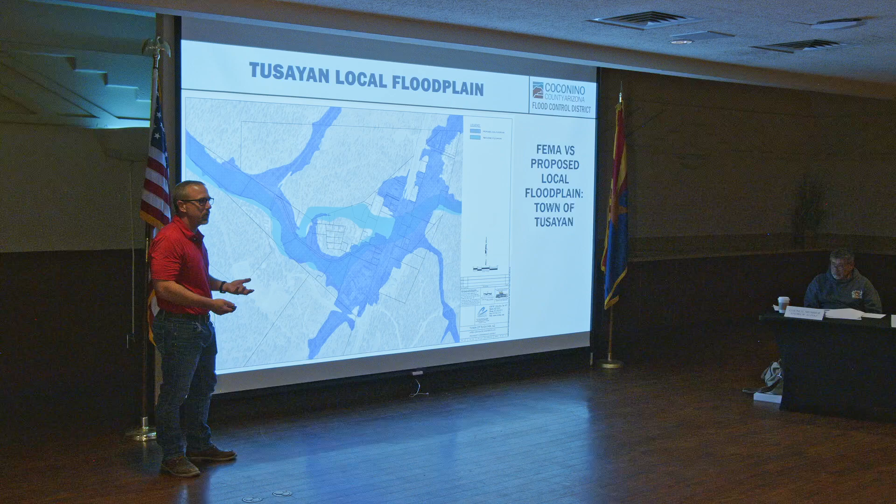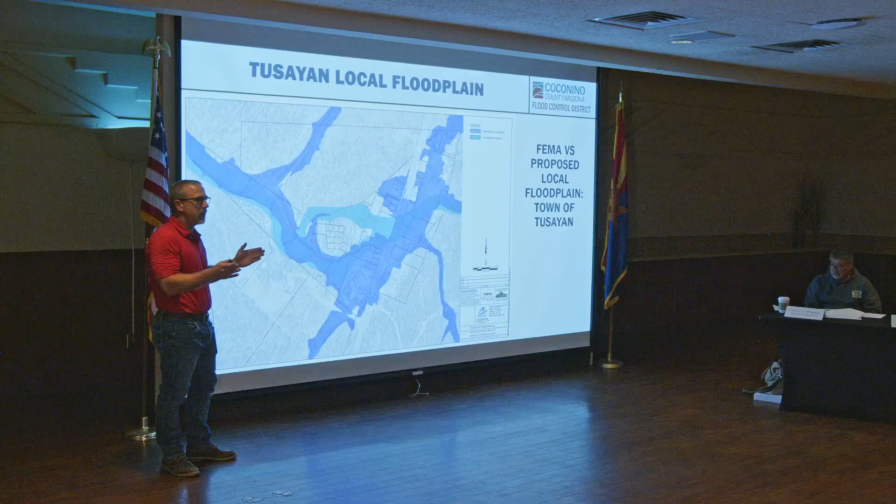We've put those numbers together, and with those discharges, we can run a hydraulics model where we take the lay of the land and land uses and run models that give us the depths, velocities, and inundation, helping us define the flood limit. That's where these local floodplains come from - it's the 100-year water surface over the land making a flood limit.

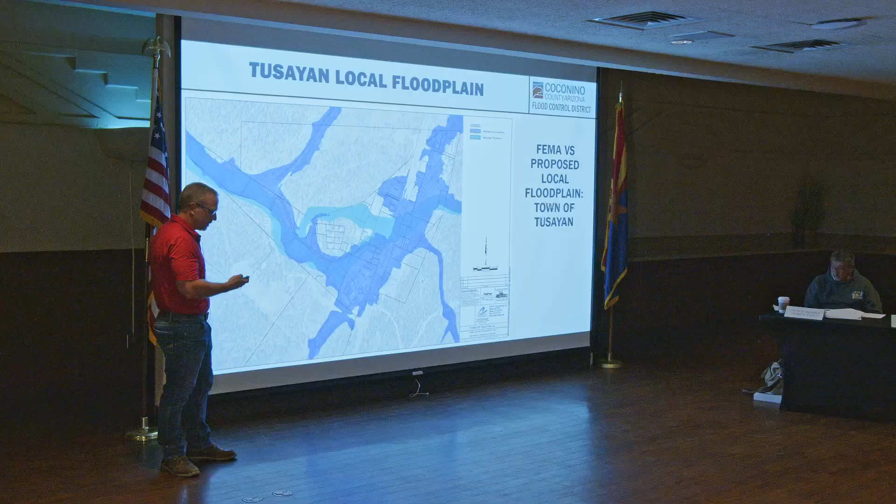I'll talk real quick about the 2023 event - everybody here is well aware of it, but just to keep it in memory. That event happened in August of 2023. It was about a 6-hour rainfall event that hit the watershed. There had been some lead up to it, but it was generally dry soils at the time, and rain hit the watershed anywhere from about a half inch of depth to about 3.5 inches of depth.

So that the centroid of the water hit mid-watershed. It was about 3.5 inches of rainfall that fell in 6 hours. That's about a 25-year rainfall depth.

But when that mass of water translated downstream, with the lower rainfall depths in the entire watershed, the discharge we got in town, at the gauge by the treatment plant, was 1,400 cubic feet per second.

So what is 1,400 cubic feet per second? That's enough water to fill an Olympic swimming pool in a minute. It's 630 fire hydrants fully open. It has the same mass as a semi going by every second. So it's a lot of water, mass-wise, volume-wise.

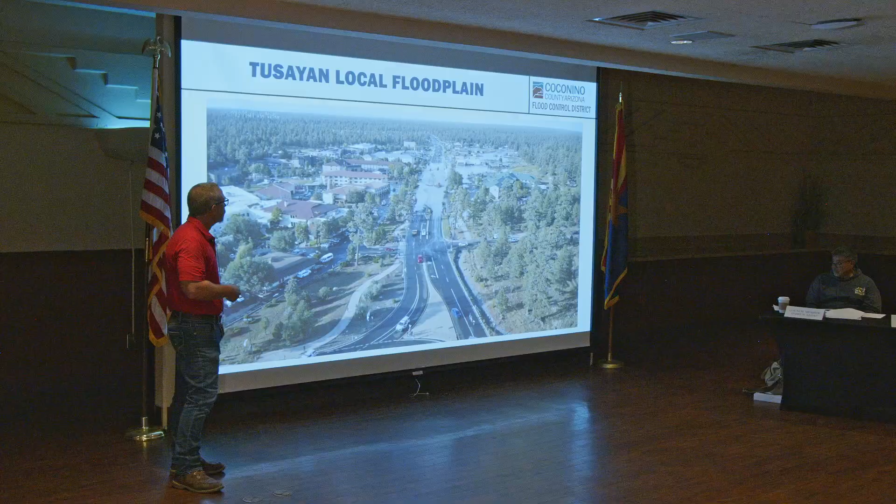This is the Zone A floodplain again here in town, and we did some analyses looking at how many parcels are flooded currently. So in town now, there's currently 21 parcels in the Zone A floodplain, and within those, there's 49 permanent structures.

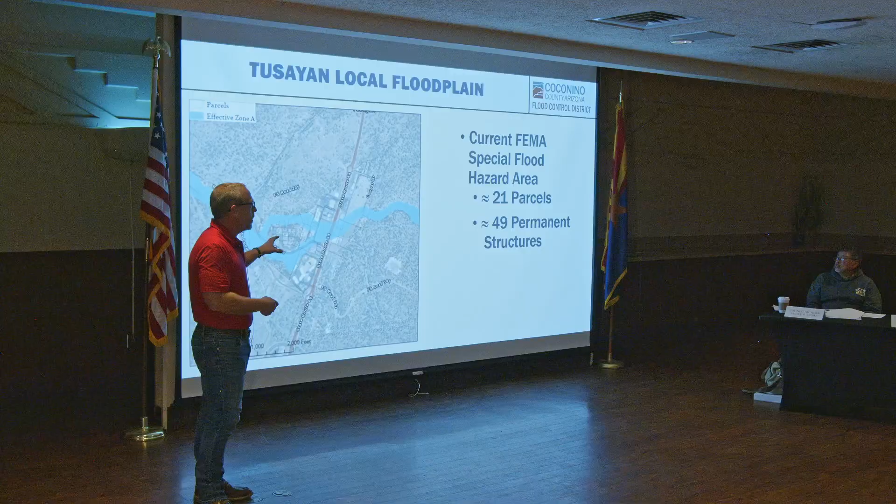In the proposed local floodplain, we go to 54 parcels and 71 permanent structures within that floodplain.

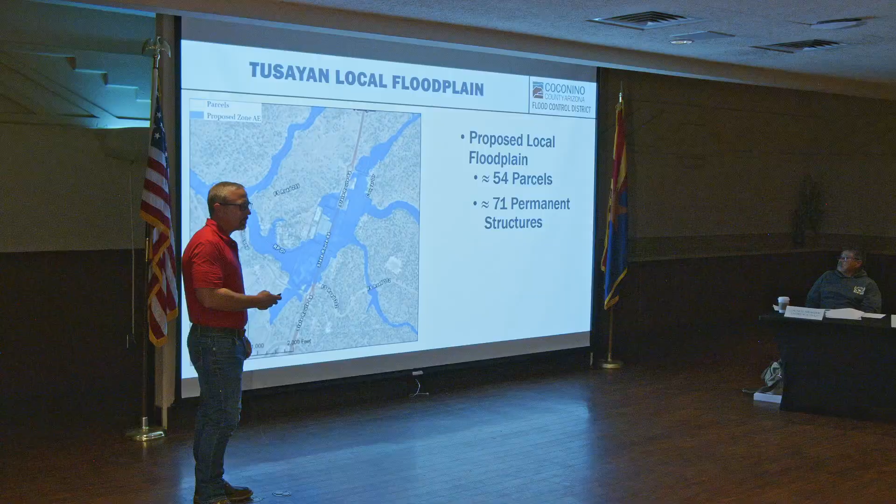So we put them together. Lucinda mentioned the floodplain ordinance is being revised. The way that ordinance is being revised, the current floodplain ordinance touches on the district having responsibility for FEMA floodplains. So currently the district has responsibility for this blue area, for the FEMA floodplains.

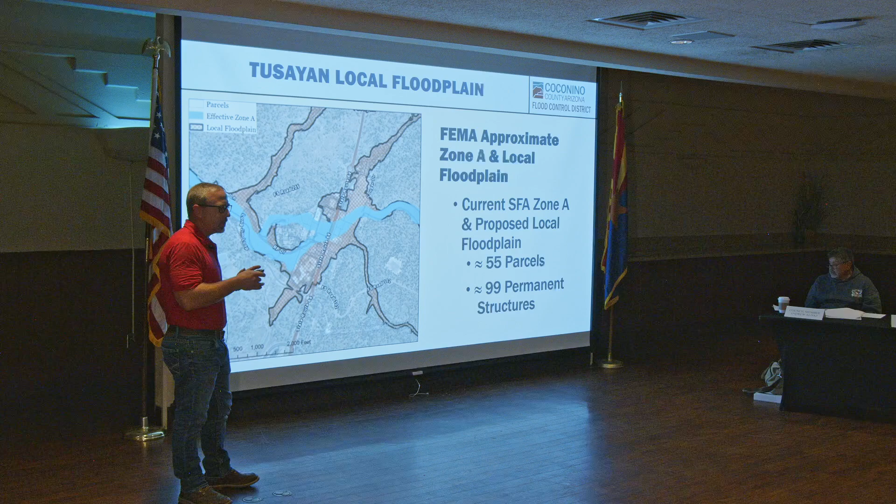The ordinance is being revised, and it looks a lot like other ordinances throughout the state, where instead of just being FEMA floodplains, it's what's called regulatory floodplains. So a regulatory floodplain will now include both local floodplains and FEMA floodplains. This is something done by agencies all throughout the state.

Other counties do it. The city of Flagstaff has two local floodplains. It's commonly used. A local floodplain is an interesting term, but what it means is it's a floodplain recognized by the local agency. Where a FEMA floodplain is recognized federally by FEMA, a local floodplain is recognized here by Coconino County, by the local agency. That's what the term local means.

Give some more examples of other communities, since there was a question about others. I know Sedona has some. I know Yavapai County does. Apache County. Are there other examples, John? Jack, yep. Yeah, and I know Pima County has them. They're all over the state, and they're regulated differently. I know Flagstaff has 2 local floodplains, and each one has its own rules and requirements, which is kind of an interesting way to do it. But there's a lot of them all over the state.

Yeah, and there's reasons to have local floodplains instead of a FEMA floodplain. I'll touch on that real quick. So the district has recognized that there's a floodplain here.

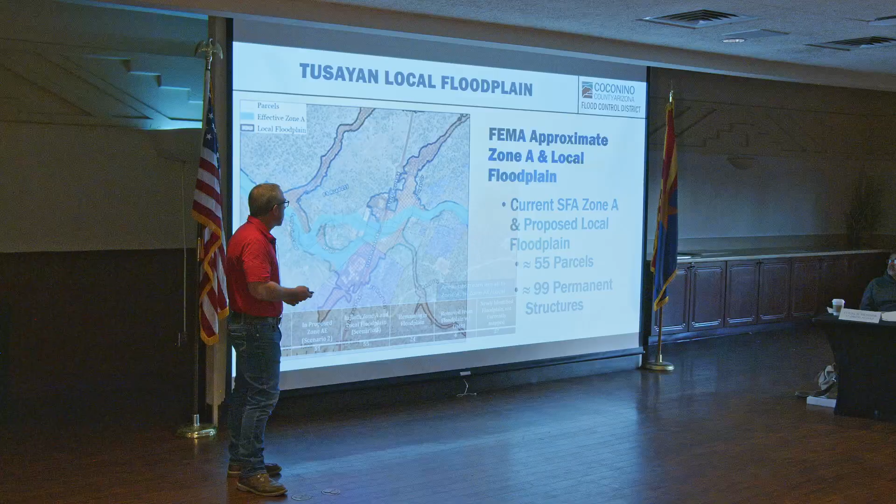Just to touch on real quick, many of you are aware, what we did here is some analyses in GIS figuring out what parcels are in the floodplain, in the Zone A floodplain, what are in the local floodplain, who we reach out to, who we coordinate with, and tell landowners here's what's happening, here's why it's happening, and give a one-on-one explanation of what's going on. So that's what we did with this information.

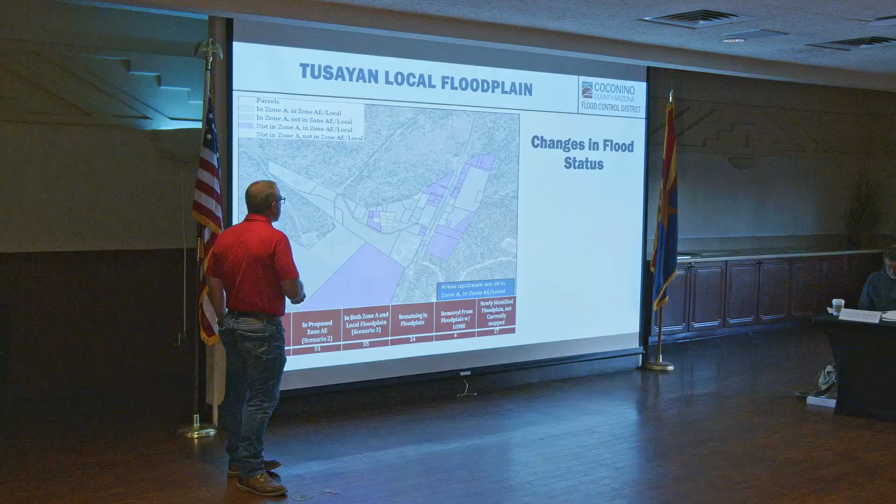So 2 more slides, and what I'm going to touch on is what does this mean? The first question is, what about flood insurance? So if you're in a Zone A floodplain, if you're in any FEMA floodplain, and you get a federally backed mortgage, you're required federally to have a flood insurance policy.

If you're in a local floodplain, there's no such requirement for flood insurance. It doesn't mean you can't have it, you should, it's recommended, but it's your choice. If you buy a property in a FEMA floodplain, there's mechanisms and triggers to tell you that you're in a FEMA floodplain, and if you get insurance or buy that property, you're told you need insurance. If you're in a local floodplain, that doesn't happen. So that's one negative of local floodplains, and as a buyer, you need to be more aware that there's tools to look into whether there's a local floodplain or not.

But the advantage of this is, if you're in the local floodplain and not in the FEMA floodplain, it's very likely that your flood insurance premiums will be a little lower. Zone A premiums are very high. If you're outside of that and in the local floodplain, you probably get a cheaper policy.

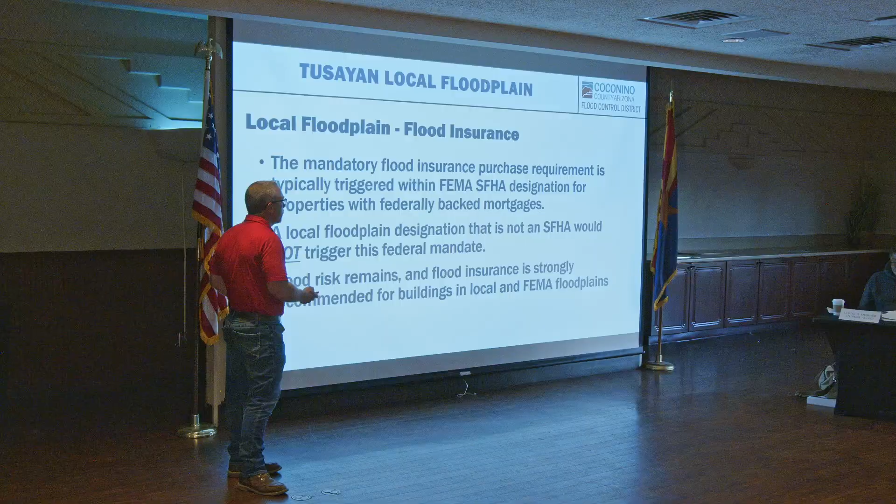In the last slide, what are the implications? Currently, if you're in that Zone A floodplain and you go to develop or remodel, you go to the flood control district, and you'd have to bring in your own model. You'd have to hire an engineer to figure out the discharge and the water surface elevation, and there's this back and forth where my engineer says it's this, the district reviews and approves it, and the district might think, well, maybe not.

Now, if you're in the Zone A floodplain, there's a study that J.E. Fuller's done that the district has adopted as the best available data. You just grab that, give it to your engineer, their model tells you the water surface elevation, and then because it's in a FEMA floodplain, you'd go through the process of going through FEMA and all of that.

If you're in a local floodplain, the difference is you only go to the district, you don't need to go to FEMA. There's no federal requirement for that. So your process will be: go to the district, we're going to do this analysis, we're going to show that our property's elevated, but you're also going to do the whole no adverse impact analysis, those kinds of things. So similar requirements to FEMA floodplains, but not going all the way to FEMA.

So with that, that is what I had. Are there any questions for me?

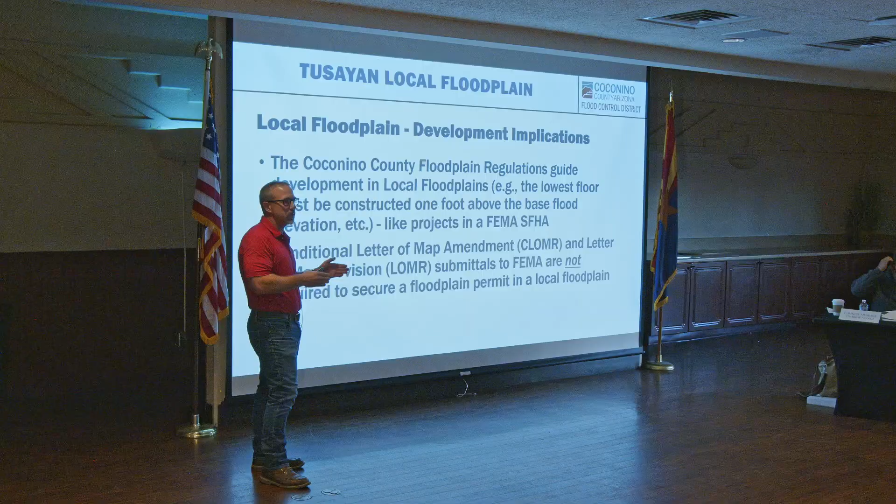John, we're going to talk about the fact that we're not going to establish a floodway like that. Yeah, so that's a question, and I'll explain what a floodway is real quick. Historically, there's what's called the floodplain — the line on the map saying here's where water goes. A floodway is an administrative tool that FEMA set up years ago to basically say, here's the most important part of a river or stream that we do not want to develop. It works really well in undeveloped areas, but it's horrible in Tusayan. If you try to put a floodway in Tusayan, you'd basically take the floodplain and say most of it's a floodway. In a floodway, you cannot do much development at all, it's really hard to develop. So the goal is, if this were to go to FEMA, this would not have a floodway. Usually FEMA would agree that if the local agency doesn't want a floodway, FEMA's not going to require that of you. Local floodplains don't have a floodway, and if you ever have a floodway, it's really hard to remove it, almost impossible, if not impossible. So yeah, that's a good question — there's not going to be a floodway on this.

I have one other question. When you were talking about the structure changes and the amount of them, are mobile homes considered permanent structures or not? I don't think we included those. The analysis we did was permanent structures provided by Bing mapping, so it's plus or minus — I don't believe there were any mobile homes in that. Okay, that's a good question though. Thanks.